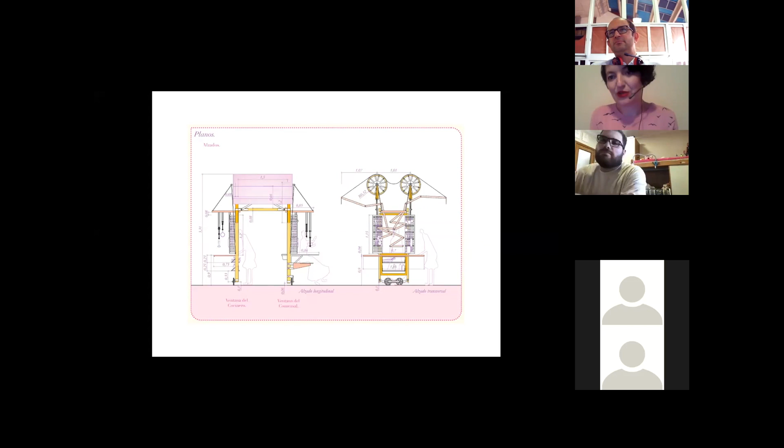They said, okay, it's going to be like having all the tools around in a very handy situation. But we were also saying, yeah, but what would be amazing is also providing the clients and customers with the same experience, so that all the tooling experience could somehow be traceable and visible for the people eating in the restaurant.

So we decided to duplicate that window and have a window for the cooker and a window for the customers, so that when the customer came to eat, they were able to see all the different tools that have been used, and they were able to even taste some of the in-between products that have been produced.

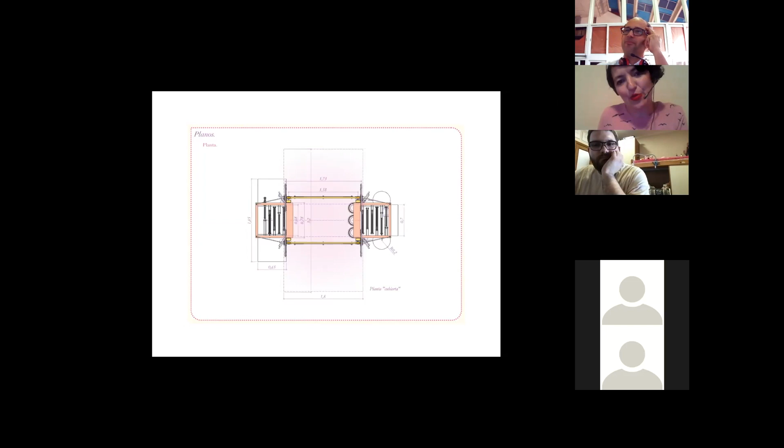This piece was introduced in the restaurant, in fact in the kitchen, because in the kitchen they have the most amazing and expensive table in the restaurant, since you can taste the food while you see how they are cooking. This device was introduced there with the idea of having these two windows, one in which the cooker could have all the tools in a cloud around him or her, and the same for the customer.

In the making, and I think this is really interesting, all these issues of the urban metabolism and the ecosystem of the timber were related to fabrication. So, for example, the different species we were looking at had completely different density, hardness, and stiffness.

So the different procedures we were using ranged from very traditional wood workshop activities to laser cutting and CNC. So digital fabrication, and that's happening for us in a lot of projects, because we live in Spain. Spain is not Italy, but it's also not the US or the Netherlands.

And we are somehow in this Mediterranean context. In our context, 96% of the contractors, the companies dedicated to building, have fewer than 3 employees. So most of our companies are really small.

People in construction are really skilled. We have very good traditional carpenters, bricklayers, well, all sorts of traditional workshop workers. Whereas we don't have a lot of prefabrication, we don't have a lot of industrialization.

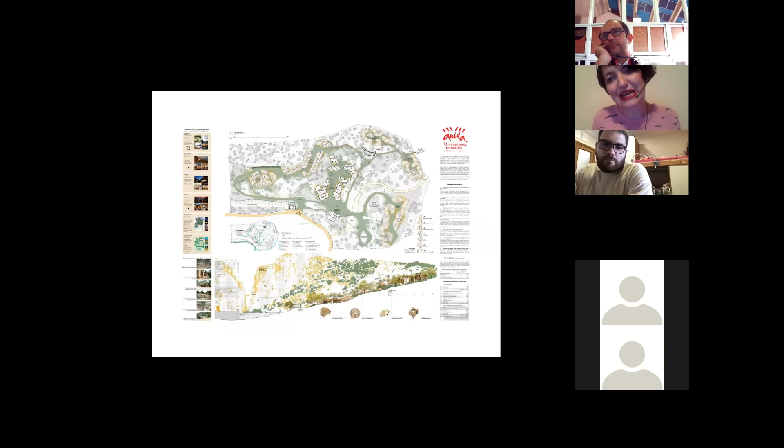At the same time, with these two radically different scales in terms of space and time, we are trying to work with the way birds have been inhabiting this territory for years and centuries, and trying to have the architectural pieces learn from that. So the experience of this camping is going to be living like a bird.

We are designing quite low-impact, temporary accommodation systems where the proximity to the water, the proximity to shadow, and the proximity to different species growing on the site are very important parameters - species that were reduced because of agricultural exploitation.

For example, here you see how our circular hanging tree houses are related to species like algarrobo and encinas, which are local species that were removed from the place to grow pines - a much faster tree that is killing the soil quality. So there is a parallel line in which we are trying to plant and grow species that were lost, and they are reappearing because this camping project is happening together with that.

Well, there are many different pieces - I won't go into detail on all of them. But because I knew you were doing movable architecture, you see in all these caravan transformations we were also looking at what are the actual possibilities of hacking existing vehicles to make them inhabitable.

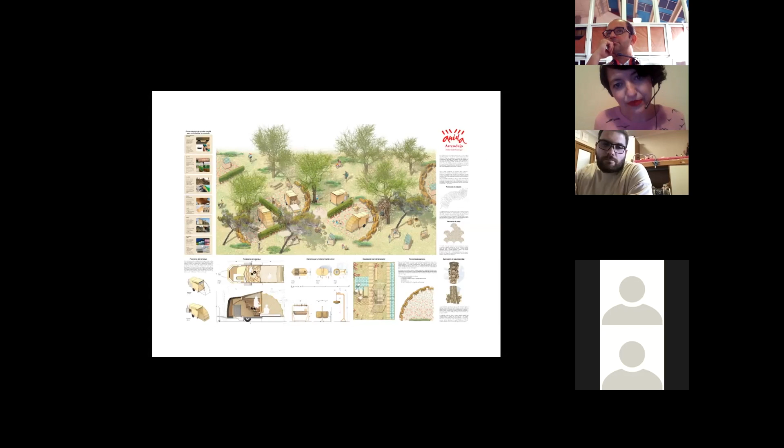What is important is that the notion of water consumption is completely different when you have a territorial approach. For example, in this project we were not building any big swimming pool, but proposing to implement 23 different small pools with a total natural depuration system. It's not using any chemicals, not even salt - just planting and macrophytes, with sunlight purifying the water. This takes us to a very small size, because otherwise it would be illegal for public use.

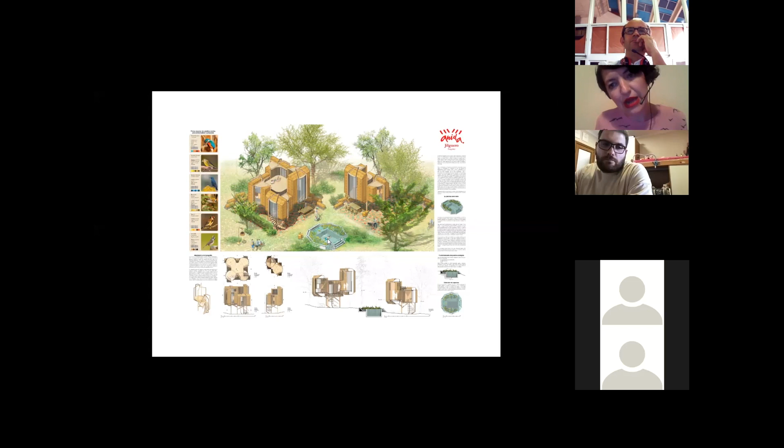It's taking us to a very interesting parallel experience between how the birds are inhabiting the place and how human beings are going to inhabit this natural park. These bungalows we're building are associated with water, which is never farther than 50 meters from the bungalow, so there's a constraint on how far and how big the architecture can be, depending on proximity to natural water.

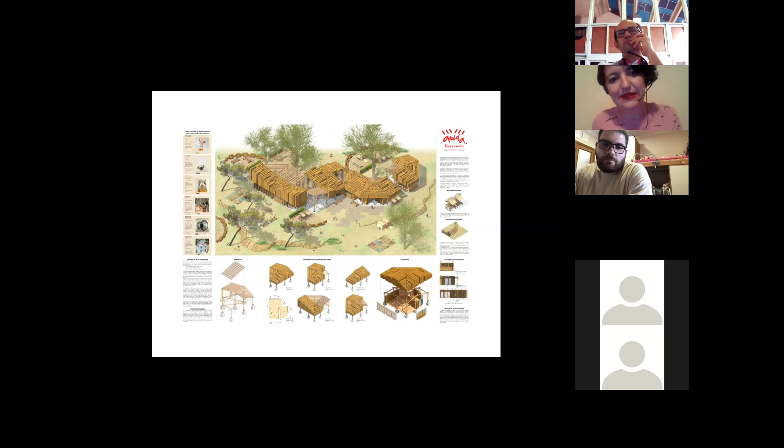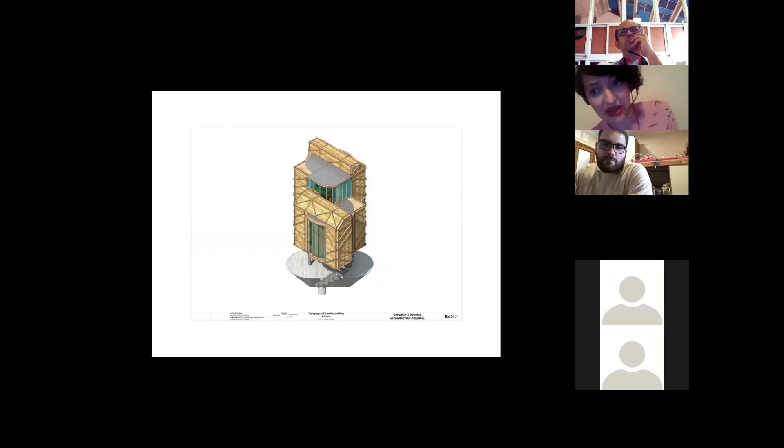These are the common areas, like a big hostel and other elements, fully done with organic materials. Since you're in this ephemeral world of dismantleable pieces, I wanted to bring some of the technical details we're developing at the moment.

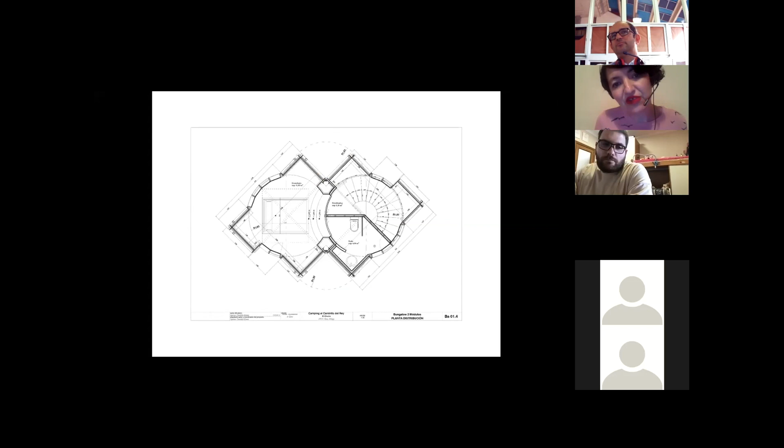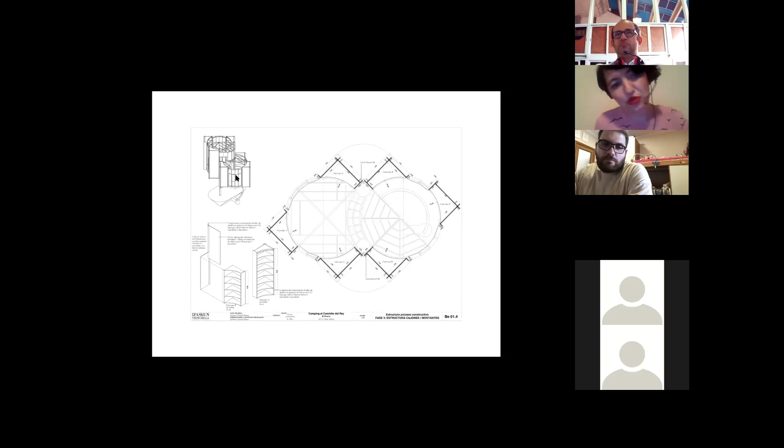We're site supervising this project at the moment, and the building methodology is quite interesting, because it's only timber boards with thatching, like a straw covering. The structural system creates U frames with super light timber elements, so there's almost no need for foundations. We have a bit of earthquake risk, so the structure is very redundant, but all of this allows for no use of any metal pieces—it's fully timber based.

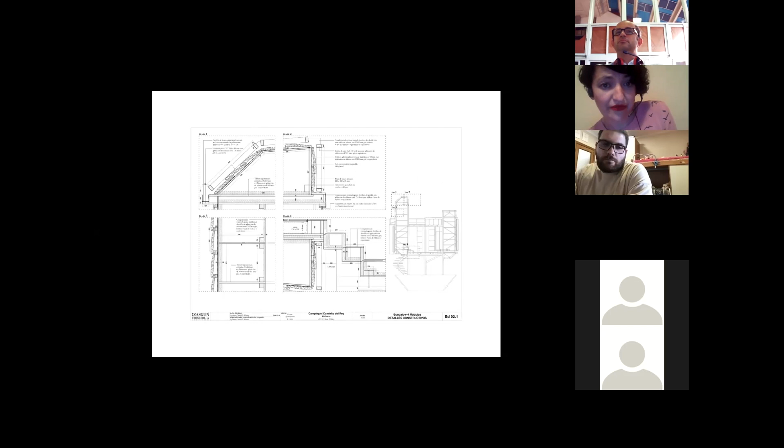Here you see the bracing, done fully in timber also. We're going to this double system where timber is protected by thatching, and the local growth of natural fibers and plants allows us to achieve a fully organic, biodegradable architecture.

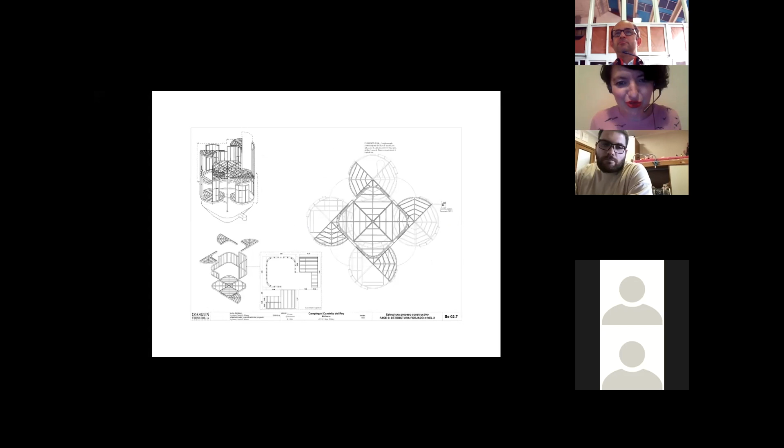This is a slightly bigger piece of architecture, but with the same principles. I wanted to show you that there is very big technical accuracy in the way we're producing this notion of reversibility.

So it's not only reversible because the architecture is collapsible, but also reversible because if any piece is abandoned in the place, it's fully biodegradable. In every project, most of our projects are reversible, even if the reversibility is planned for 100 years. But we always start projecting with how it's going to be dismantled—the requirements differ. For example, in this natural park, biodegradability requirements were fundamental.

There's a big shift in the lecture at this moment. In the first design exercise I was introducing, I was looking more at this new responsibility or new concept of impact that is expanding geographically, in weather and climate, time-wise, socially, and ethically—establishing a link between environmental context and design.

I also think it's very important to have this big picture—the big scale in the city, in a social and urban context—alongside the little detail in the design. So I was introducing here the notion of the caring city, for several reasons, because I think there's an over-attention to productivity and productive activities in the city.

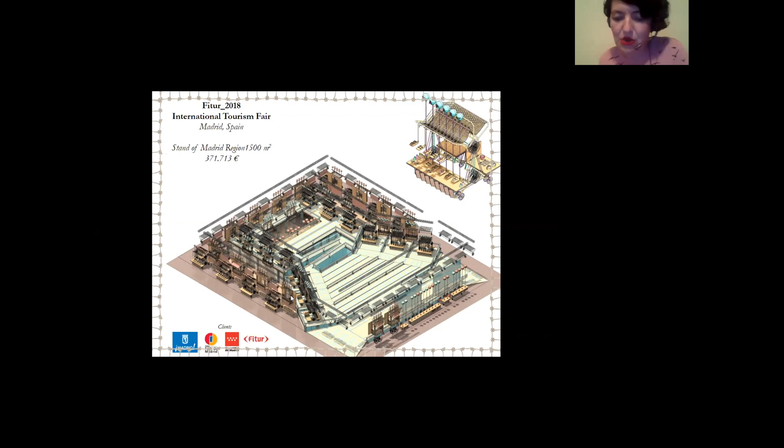So there is this way of incorporating the notion of the organic market. Formally, what we did was redraw some of the public spaces in the city to see how permeability, and what is called topological depth—how permeable the different layers of the city are—is really important in most of the successful public spaces in Madrid.

These are drawings we were doing in key places of the city to understand how private and public life were happening in transparent sequences, so that you usually had an animated public space, an animated trading situation. You had arcades that were visually permeable, and many times you could see what was happening in the private life of people.

This might sound familiar to somebody from Sicily or Rome, not to mention Napoli—it's quite standard there. And this is happening not only in Madrid as a city, but in the whole region. It's all about squares with a whole permeability, a topological depth from inside to outside, in which private life has participated actively in the constitution of the plaza.

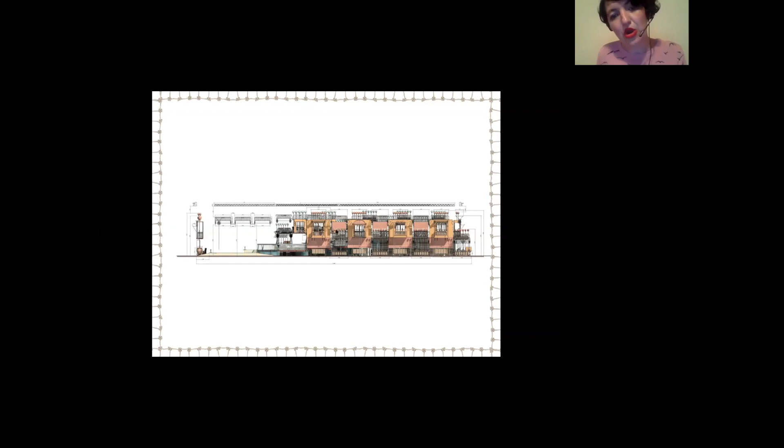So you see how we tried to replicate this topological depth with elements that were like anonymous balconies, fundamental in Madrid, and the stalls for the different stakeholders, which were movable pieces. That created a very interesting effect for us, because wherever you approached the 1,500 square meter space, you were always finding a face.

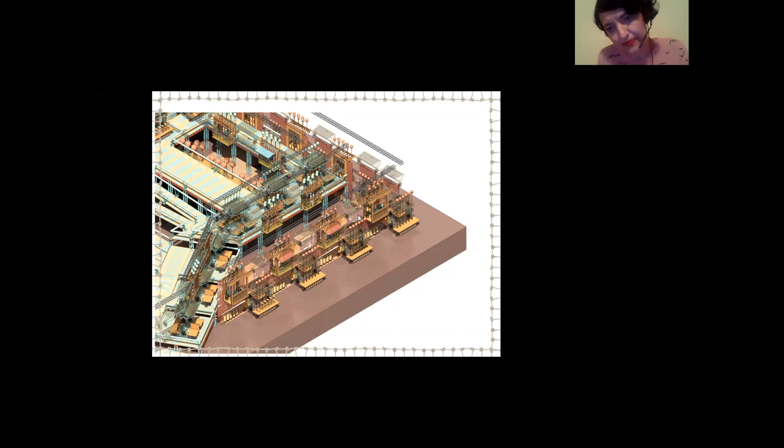In this specific project, the most important elements were the security fences the council uses in demonstrations and to control traffic. We were able to get 3,000 of them. So all the structures of the stalls were built with them, but we weren't able to weld, because it's circular economy—they went back to their original use.

Joints at the office could be another chapter, a long one, because a lot of circular economy elements are affected by these issues. Even painting is a whole problem for circularity.

Besides negotiating this transitional use of materials like the security fences, we also used these nautical buoys that were later donated to a nautical school in Madrid, on a lake, and low impact cardboard and recycled materials for other elements.

So what I wanted to show you is how a very ephemeral, quite movable type of construction—short structural elements that behave and perform like a stall, a quite simple kiosk—are able to actually replicate, or critically review, the spatial structure of the city and its spatial conditions.

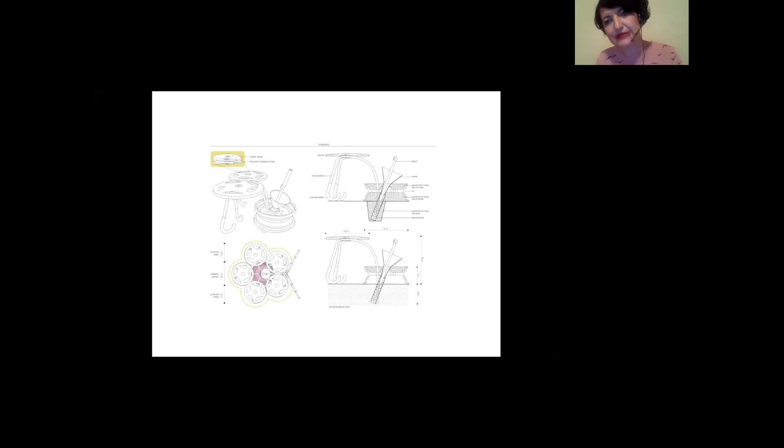Here you see how we created redundant structures, because the problem with recycled materials is that usually they are damaged. They have a plastic deformation that doesn't allow them to perform like a perfectly brand new steel bar. So there are redundancy levels: the bikes making a continuous dome, the supports like pyramids, super stable, bracing happening in different layers, redundancy in every bar, with the bike wheels and umbrellas attached together to create a continuous dome.

And here you see again the notion of redundancy and what we call capacity design, working on the rigidity of the structure by looking at the joints rather than the rigidity or stiffness of the bars, because we cannot trust them. This is how all these elements created a continuous structure.

This is a brochure we produced for the volunteers who were going to participate. We created this with a full-scale prototype done in Spain in advance, so everybody could anticipate their experience, the learning, and the engagement they could have. For us, full prototyping is a whole research methodology, because our structural engineers don't trust many of the things we ask them, so only prototyping sometimes brings us to a mathematical process based on empirical knowledge.

And you see this device here. But what I think is relevant for your workshop is this notion of the official lifespan of objects versus the unofficial one. I think the plastic bottle is significant enough.

These are images from one last project, but the concept is more or less the same: the VIP room in an art fair in Madrid, where we were called for a 1-week project. For us it's really difficult because we do a lot of ephemeral architecture, but we also do more traditional buildings. Still, we always have this time policy, time consideration, recycling, and dismantling planning.

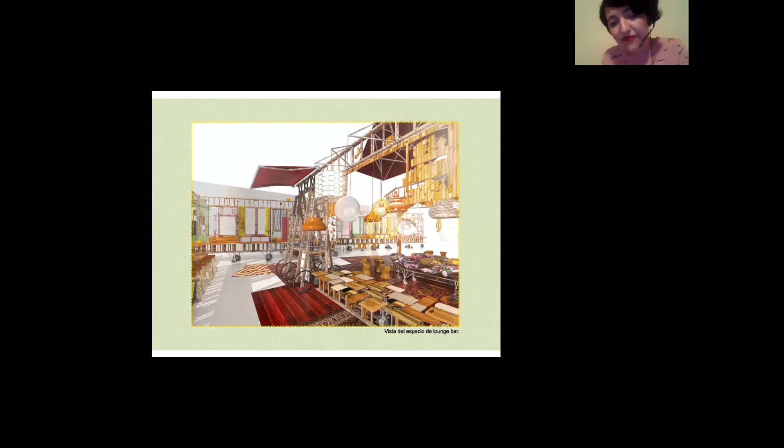But in all cases, the reflection was about the pieces of furniture that El Corte Inglés was going to donate, how they could be reused in a circular notion, and how the main structures could be self-stable in a more segmented way, so that they were more likely to be reused afterward.

We were also working with memories of traveling to places where people negotiate contracts in the street, in public space, creating this notion of a public space happening in an indoor context, traveling from places like Dublin or Istanbul in Europe to this more Casbah-inspired central space, and to a Southeast Asia kind of environment, always playing with this idea of negotiating and creating a public space indoors.

I think we're about to come to the end, so I hope the questions are there. Thank you so much for your attention, and I hope it has been useful and significant for you. Thank you so much.